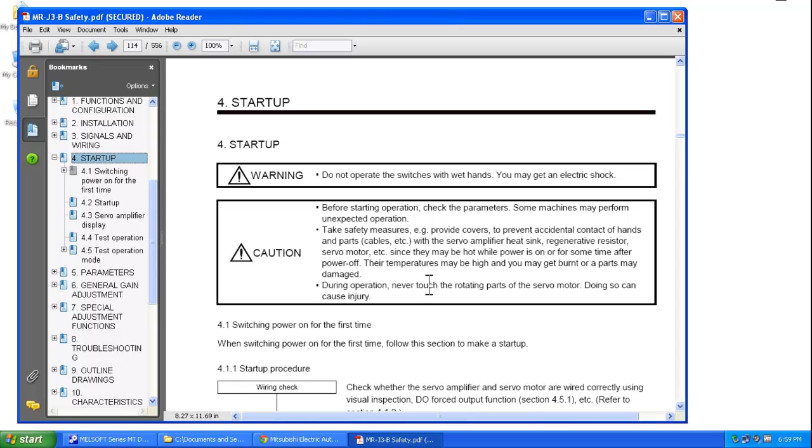Today we're going to talk about some of the display messages you'll see on an MR-J3 series servo amplifier. Now I have here the J3B safety amplifier manual, and a good place to start for understanding some of the messages that show up on the servo amplifier is section 4 for startup. If you take a look in section 4.3, this gives you a really nice overview of some of the messages you'll see.

When you first turn on the power, if communication from the controller to the amplifier is not happening correctly, you'll get a message AB that shows up, which essentially means that you're waiting for the controller to establish its communication to the amplifier. Once that's been established, the message will change. It will flash through the sequence fairly quickly while it initializes. Then you'll see a status B01.

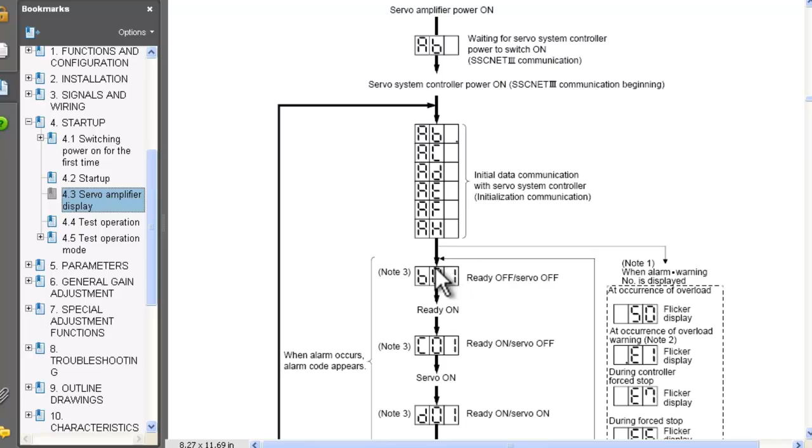Now B01 will display if there are no warnings, and the warnings that you may come across would be a 50 that's flickering, which means there's an overload, an E1 that flickers, it's an overload warning, an E7 which means that your controller has a forced stop, or an E6 which means that your amplifier is forcing a stop. So once these warnings have been cleared out of the way, you'll get a B01, which means that you're waiting for the controller now to do a servo on command.

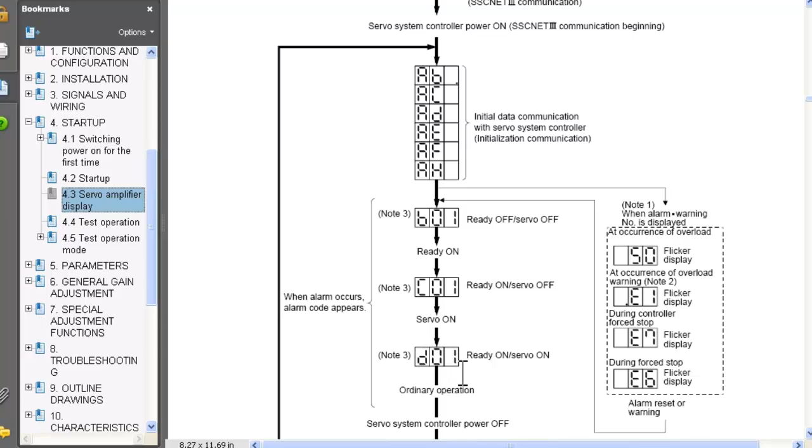It will then change to the ready state and then go to D01. D01 is for the first amplifier. For your second amplifier, it will say D02, and D03 for the third, and so on. This is really what the machine will be operating with, is D01. This is how you can tell that the servo is locked and you're ready to begin operating the machine.

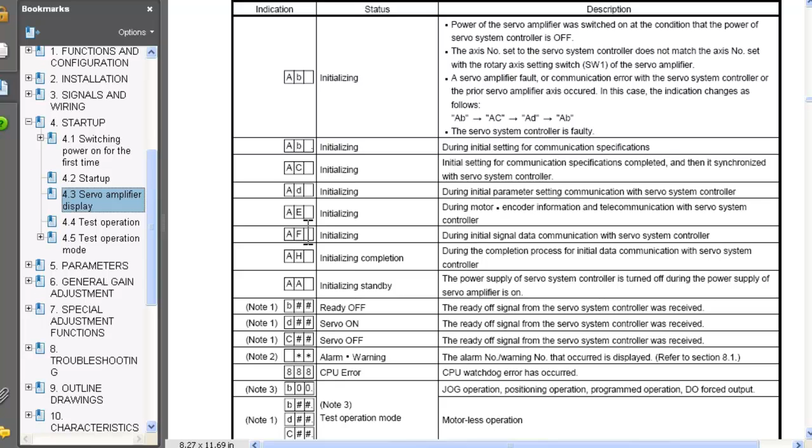Other messages are available on the next page. If you scroll all the way down here, you can see a total list of all the indications that show up on the 7-segment LED display. And then if you want additional information about alarm statuses, every chapter in the Mitsubishi manuals has a troubleshooting section.

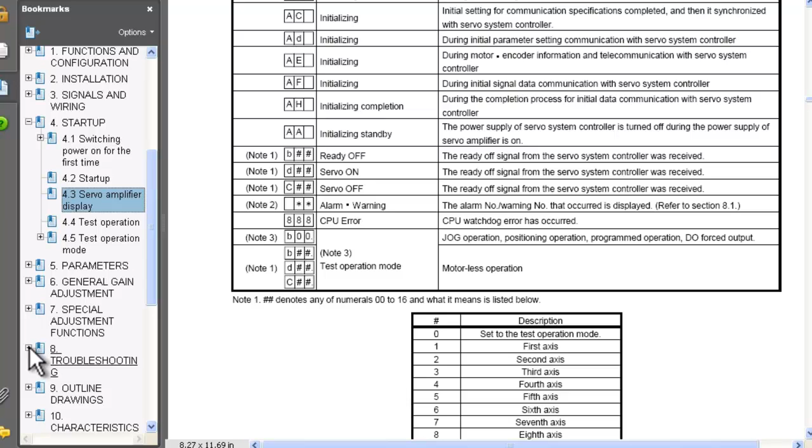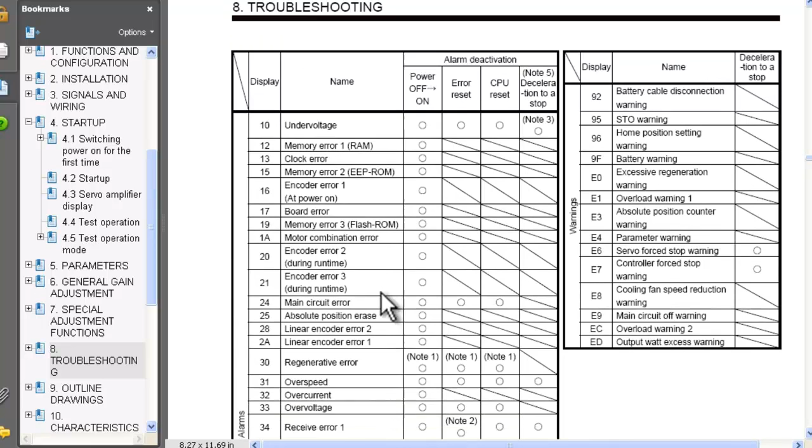So over here in chapter 8 for J3B safety, you have a troubleshooting section, and if I go down to the next page, you can see a list of all of the alarms and warning messages. So this is a really useful resource. And then from within the troubleshooting section, you can find actions that you can take to clear those alarms. Thanks a lot for listening, and we'll see you next time.